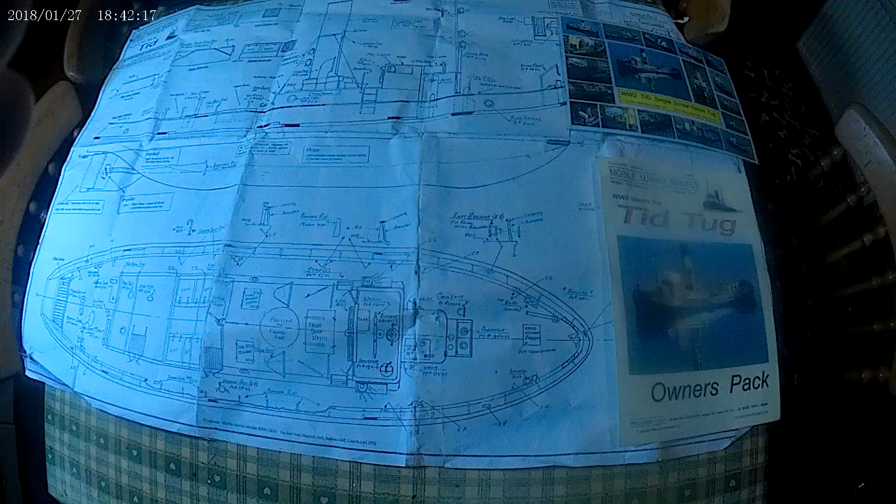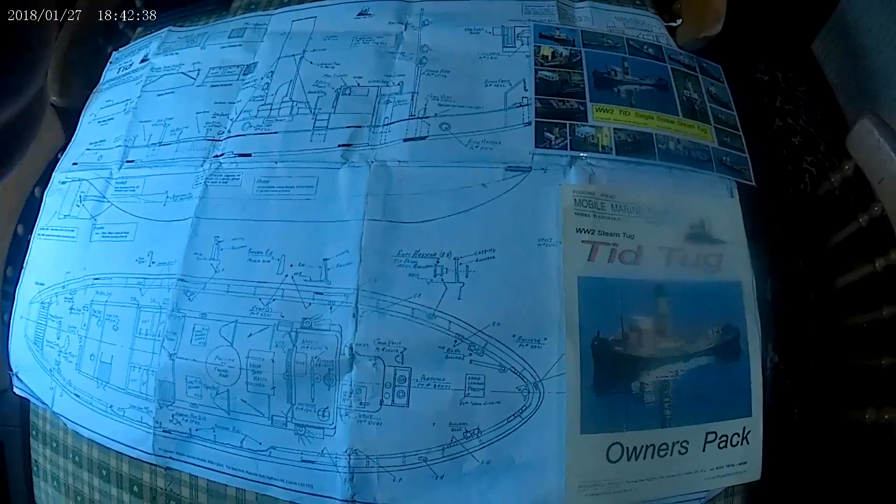I was given this model of a T.I.D tug my last birthday. I actually worked on one of these way back in 1968, when I was first married, to have a short job to be at home with my new wife. This didn't last long. A few months later I went back to sea to earn a living, but somebody was nice enough to give me the model as a memento.

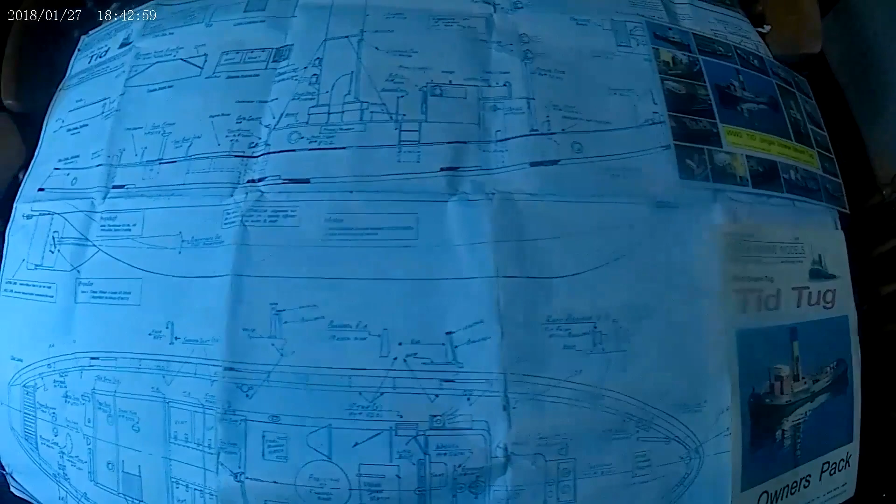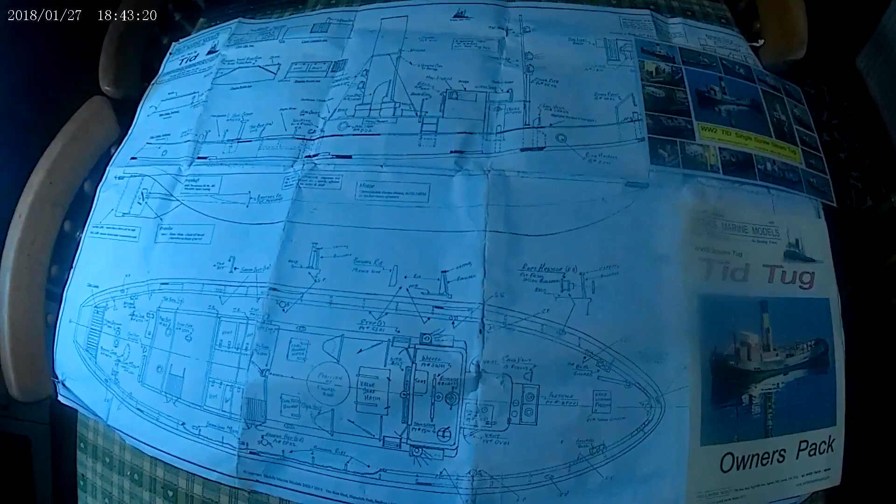It didn't work out so well. Somebody had made a complete hash of it. The hull was split, the prop shaft was out of line, as was the rudder post. They put radio control gear in it and screwed it. Unfortunately, the screws went right through the hull.

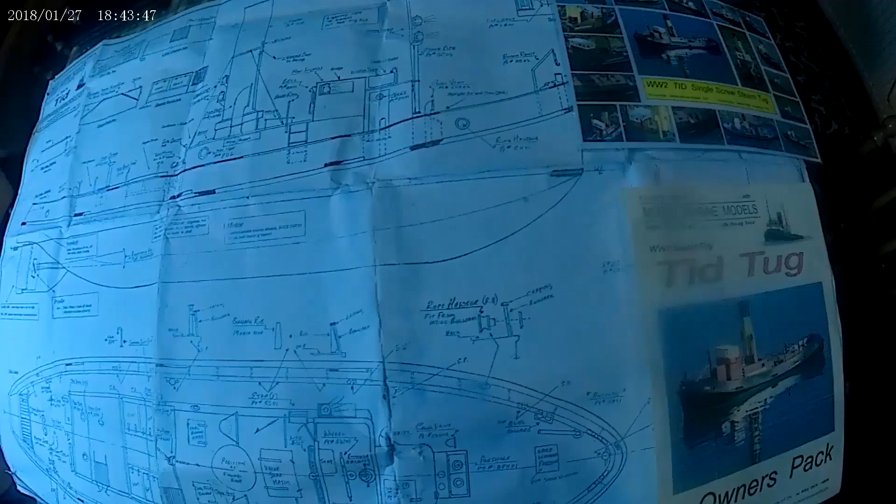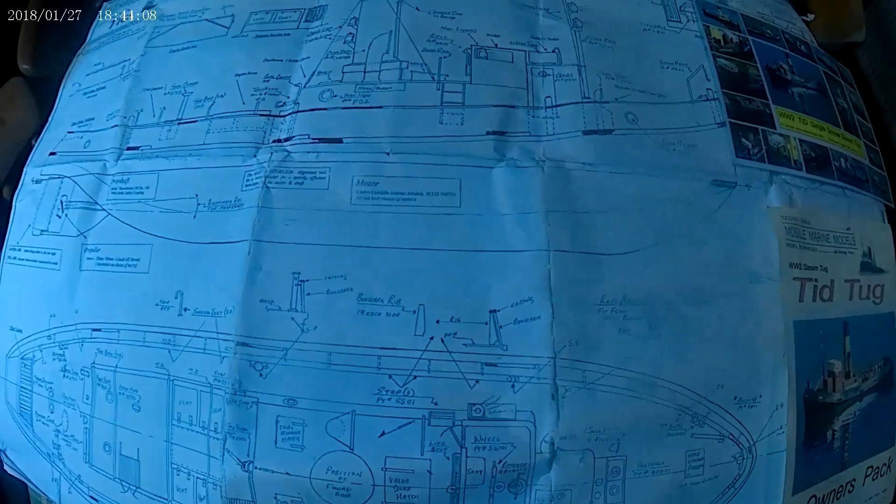The engine they tried to put in was completely unsuitable. It was a Mamod boiler that I'm told has a tendency for the burners to flare up. This one certainly did. Nearly set the whole boat on fire. And it was coupled to a two-cylinder Mamod oscillating engine, which leaked steam all over the place. It was too tall and really too heavy for the hull to float properly.

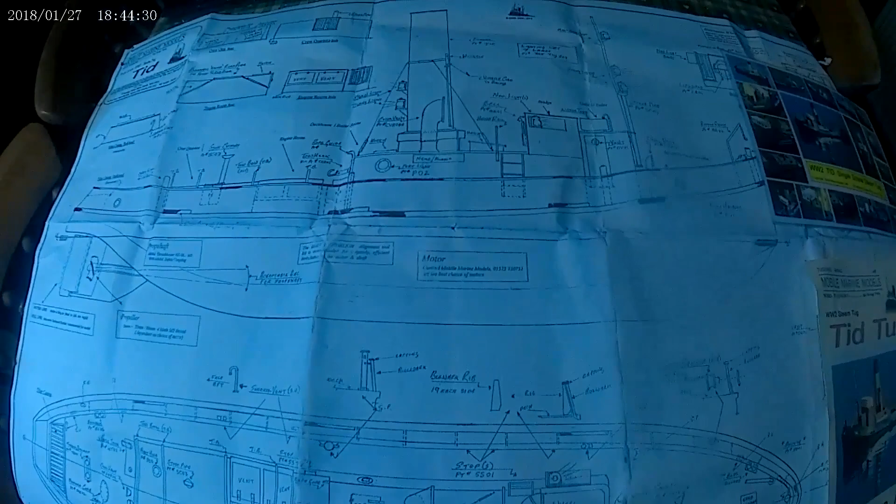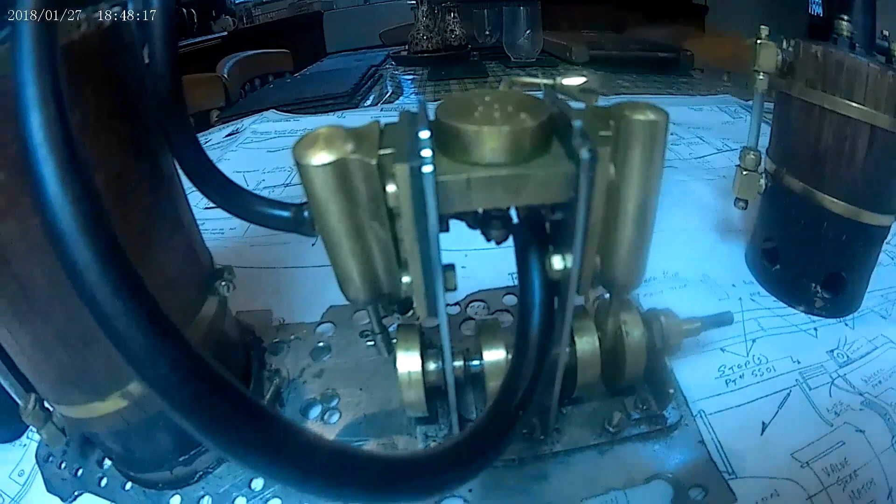So I tried to replace it with this Cheddar boiler. But although that's an excellent boiler, produces steam well, again it has little endurance and it's far too heavy and tall for the model. There's the engine, the Mamod engine. The problem with that was it leaked steam everywhere. You name it, everywhere. It just wasn't worth fixing.

So I did a lot of head scratching and decided to put in an electric motor. I like steam, but not for this size of tug. It just doesn't work. Well, it didn't for me anyway.

That's the repairs to the hull started. There's a patch inside and these bilge keels fitted for strengthening the whole thing. They're both sides obviously. I've extended the keel a little bit here and aft here, and the rudder skeg is a little bit deeper. These two latter things are to give a bit more directional stability. You can see the hole here, I hope, little dimple there, which is where I've repaired the hole where the screw went through from the old radio control unit.

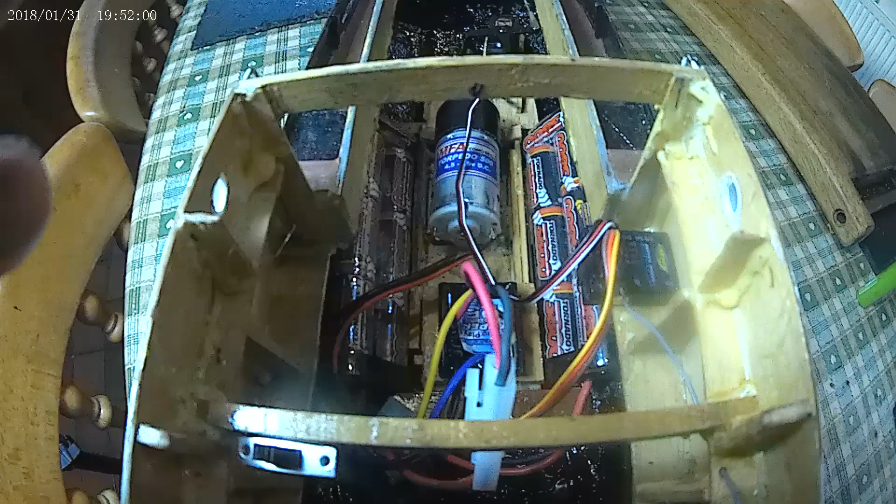Well, there's the electric motor fitted. Universal joint there to take any slight misalignment out anyway. There's the steering motor, the speed controller there for radio control, with the receiver tucked away here, and the aerial along here.

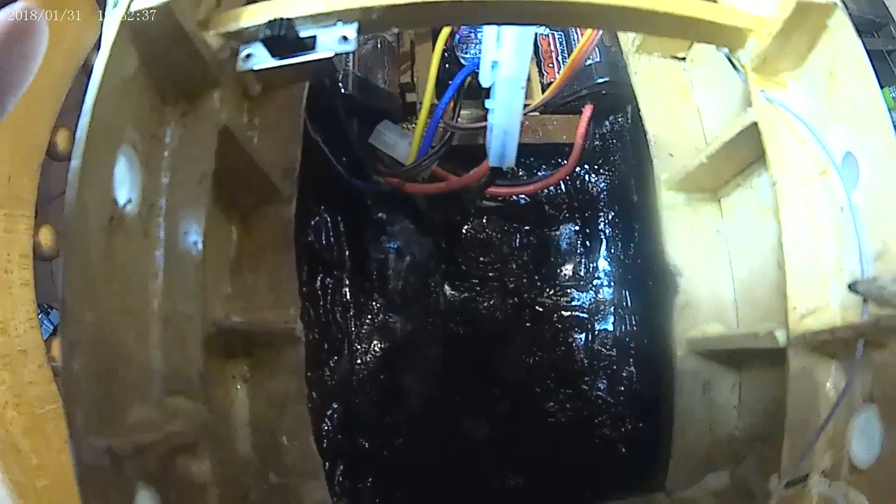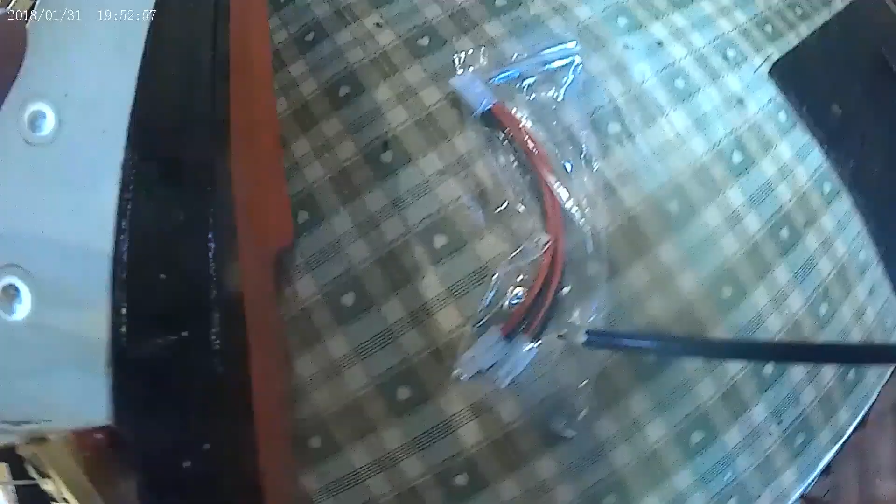As you can see, there's two banks of batteries, one here and one there. They give quite a bit of range, but I can also use this Y coupler here, so I can join the two batteries up in parallel to extend the range even further.

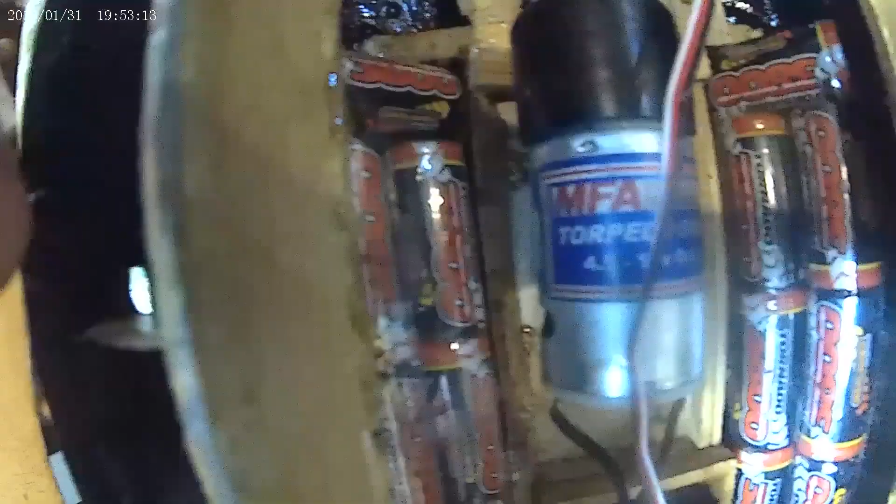Right, let's give the motor a run. The steering working. Whoops. There's a 6-to-1 reduction gearbox on that motor, so it gives a decent realistic speed. Oh, and the rudder turns nicely.

Sorry if this video is a bit shaky, but operating the remote control with one hand and the camera with the other is a little bit difficult.

Right, so the next job will be to make the boat deck, bridge deck, whatever you want to call it, first and then put it on, and the engine room casing and towing deck. Lots of fiddly stuff to do on that, so it'll take a bit of time, but you get the general idea of the tug and how she's going to look.